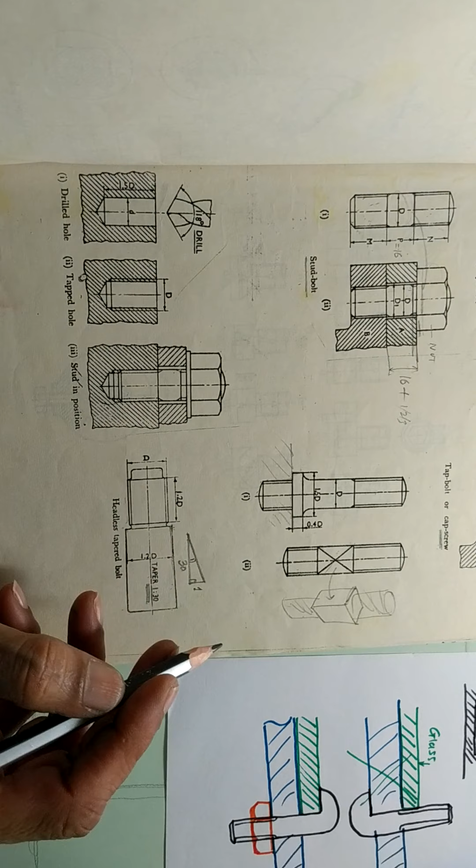The head is fitted into whatever plate you are using, and then the clamping takes place. Suppose we want to see how it looks like, it can be shown like this.

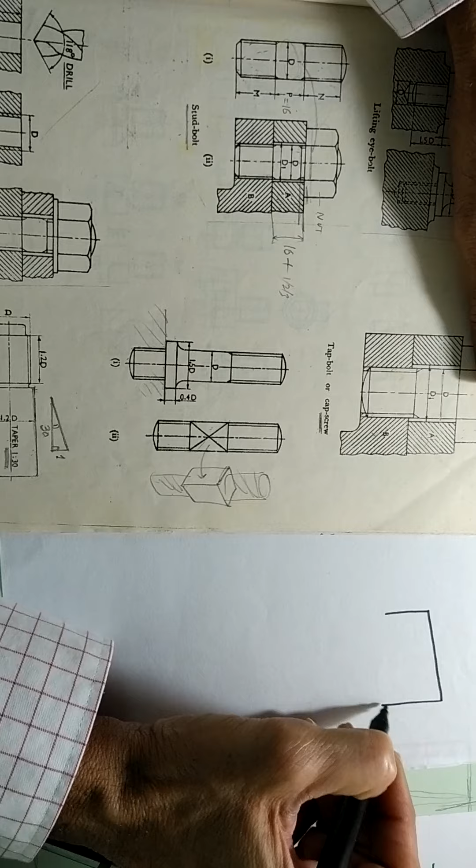So there is a taper head, then there is a threaded shape, there is a threading, in this part there is undercut, and this is just a remaining part.

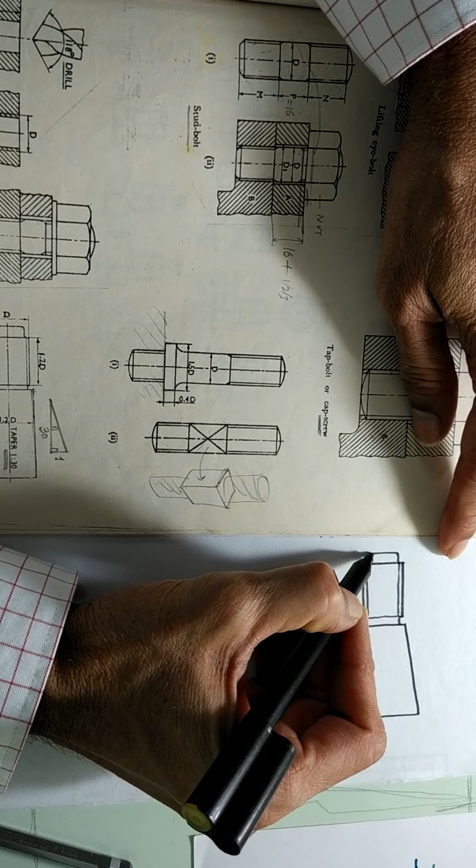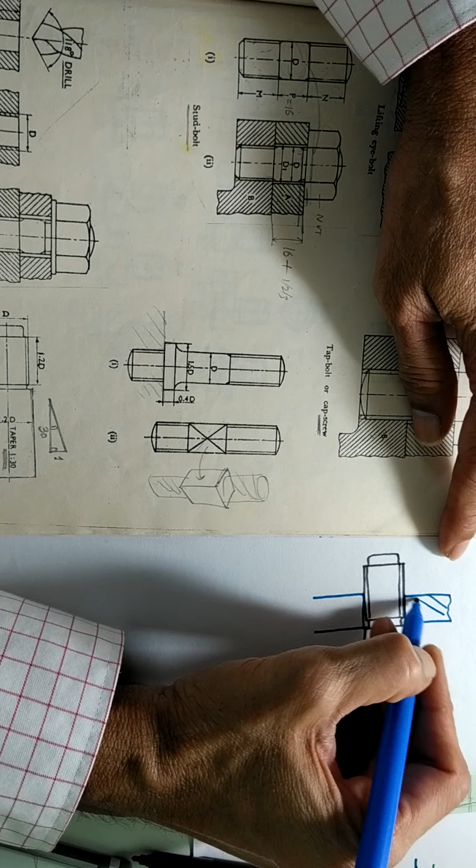So the frame in which it is fitted, you can think of a frame something like this. In this frame there is a hole, say this is the hole. So this is a frame, and on this side, or maybe you can call this as a frame and this as a part.

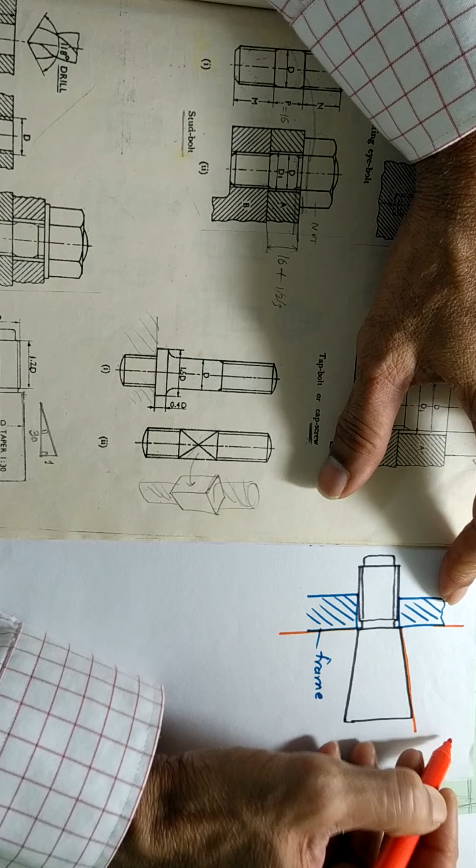Maybe I can show like this. Let us call this as a frame, not this. This is frame, and to this frame you are fixing this as a plate. So you want to fit this plate to this frame.

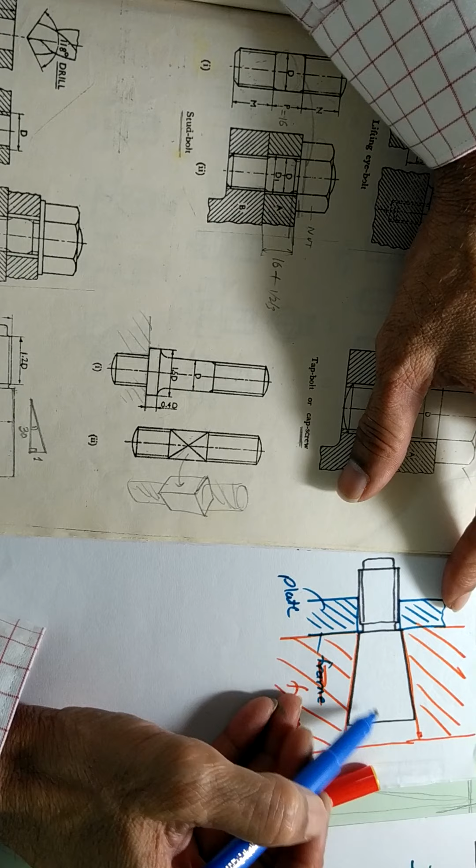So in the frame you have made this taper hole. The taper bolt is fitted like this. Then it is projected out on this side like this, and on this side you are having a plate, and after the plate now you are trying to clamp it with the help of a nut. So here nut will come like this.

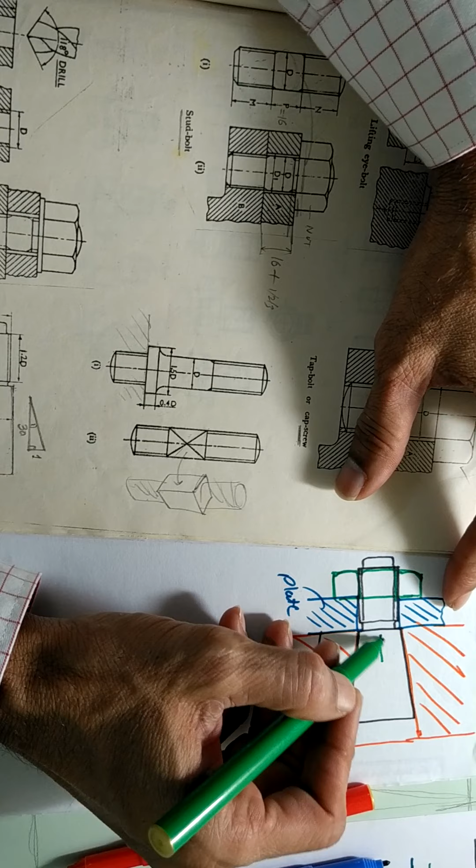So with this nut you have clamped this particular plate to the frame, and this part of the head, it is not possible for us to hold it, but because of the taper shape and the friction, when you are trying to clamp this nut, the bolt will be pulled in this direction, and friction will be applicable here. Because of frictional force, this particular head will not rotate, and then you will be able to clamp the nut, and the overall clamping will take place.

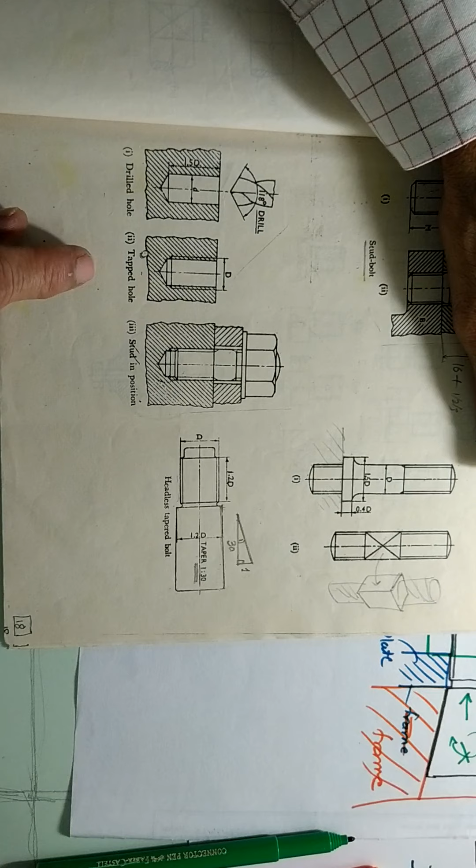Now next is the assembly of nut into the internal threading. Now this is extremely important topic. This particular topic is extremely important. What we are going to learn here is the threading convention. So try to follow this very well.

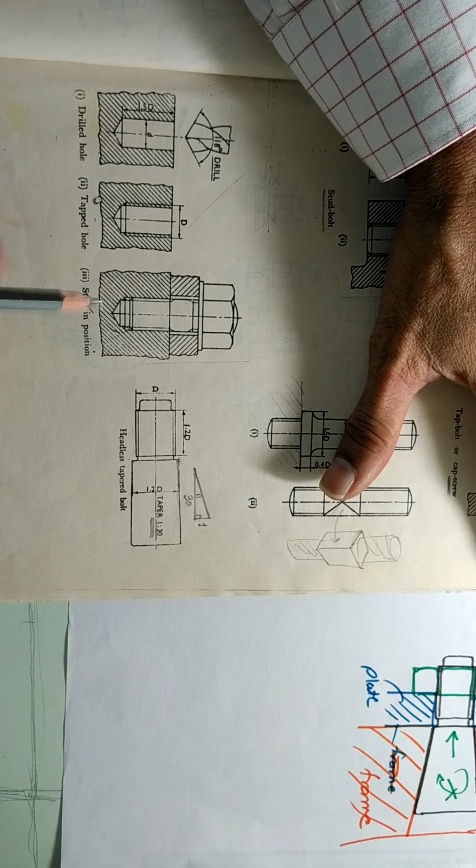We are going to draw a lot of nut bolts in the case of assembly and detailed drawings. So that time this convention is extremely important. Please let me repeat again, this topic is extremely important. We are going to use this convention many times in future. So try to understand this very well.

What is shown here is, this is a part, maybe this is a frame. In this frame you are trying to fit this plate on this frame with the help of a stud or any bolt, you can say. So how this is done is shown in 3 steps.

So first thing is, in this frame, this is a frame. In this frame, initially a hole is drilled. So this D is the size of the hole. Initially hole is drilled, and because of this hole, you can see here a drill is shown.

The angle of this tip of the drill is normally 118 degrees. As a result, there is a conical shape shown here at the end of the drilled hole because of this conical shape of the drill. So the drill hole is made of certain depth, in this case 1.5 D.

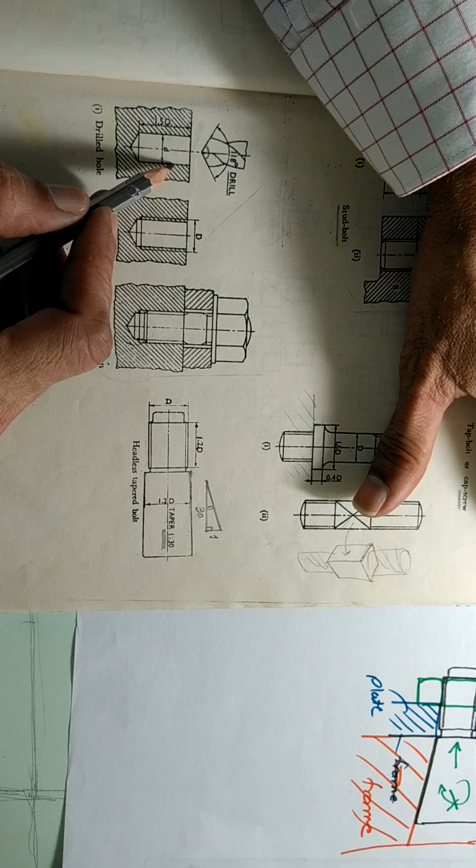It can change. Then threading is cut onto this surface. So whatever surface you see here, in this surface threading is cut. So when you cut a threading, the material is removed from this. I will draw maybe here.

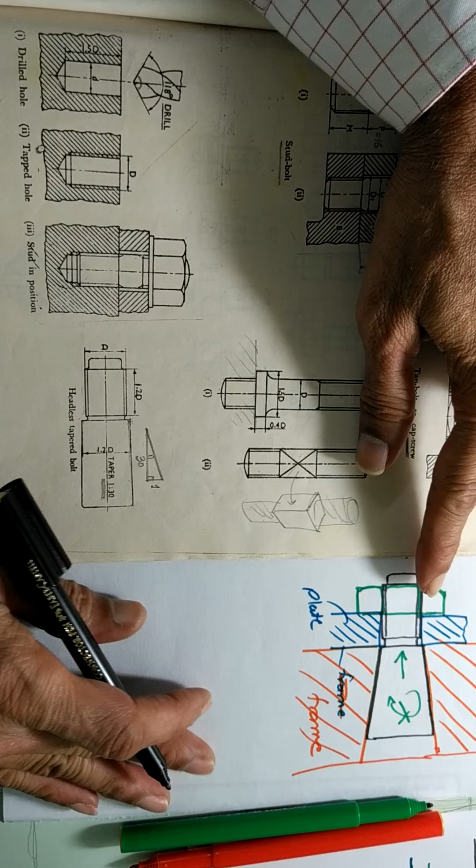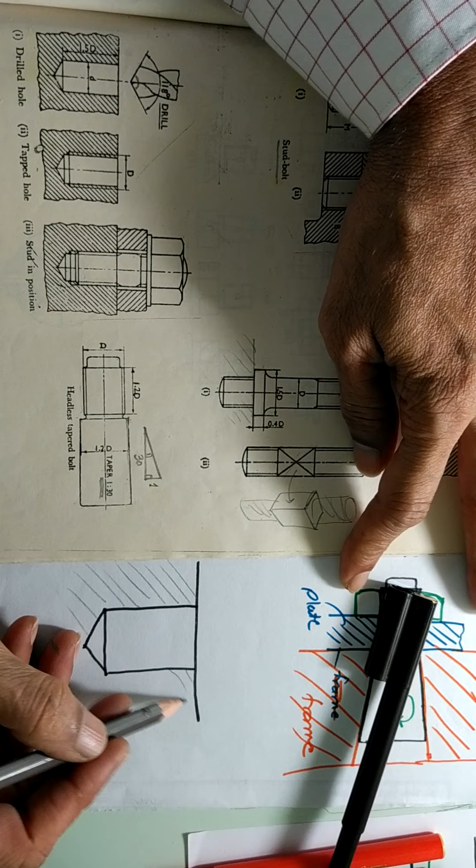So here this is a frame, and in this frame a hole is drilled first like this, and here there is a material. Now when you cut a thread, from this surface you are going to cut and remove material to form a helical groove.

So if I show in real practice, this is a kind of a groove, this will not be there, and you have removed material and formed a helical groove of a thread. Now we are not showing the threading like this, we are showing the threading by convention.

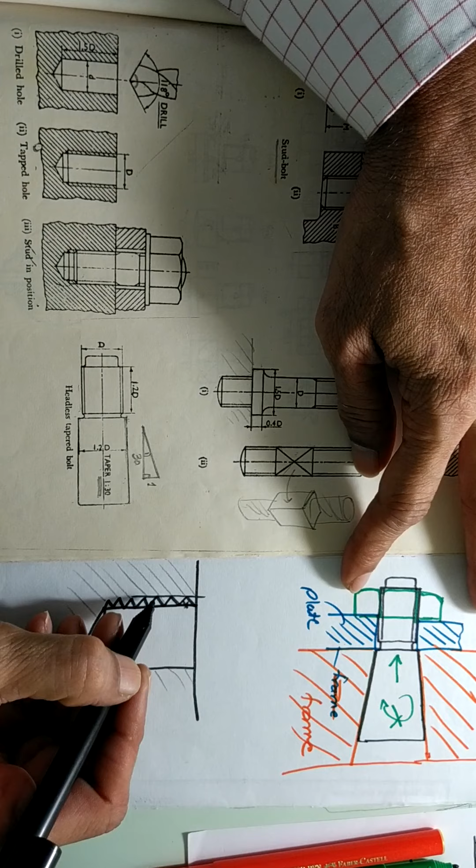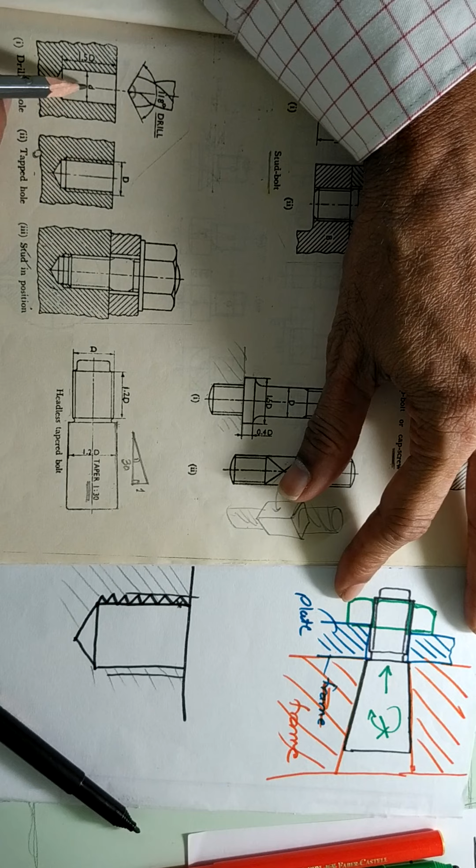So this particular diameter, which is the diameter inside the groove, is shown by one light line over here. You can see now here, this line is drawn both sides, which is not a dark line, it is medium dark, drawn outside this small d. Now this out to out distance is capital D. This inside distance is small d, outside distance is capital D.

So in this case, this is capital D, and here this much is small d diameter. So threading is shown by this convention.

So out of this total depth, suppose I will just show some numerical values. The hole was drilled of, let's say, depth say 26. That means this 1.5 D is 26. Then out of that, the threading is cut for certain depth. Now this cannot be 26, this will be less. So let's say 24 mm depth is the depth up to which the threading is cut, which we are showing like this as a convention.

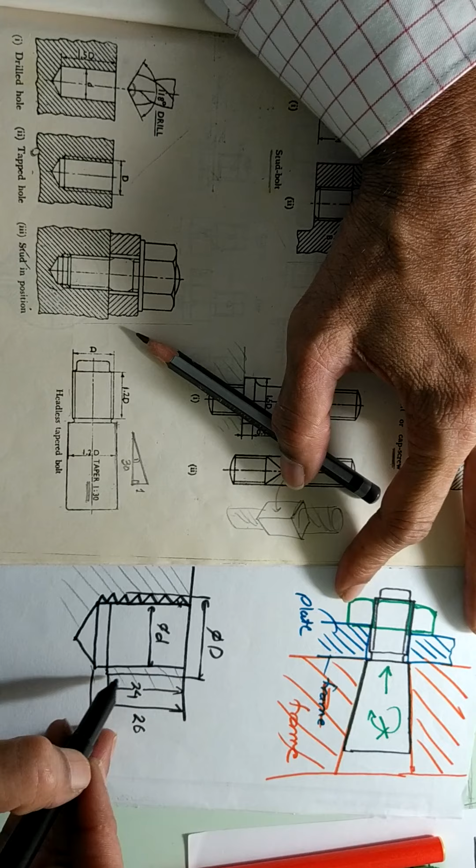Now as far as the section lines are concerned, these section lines will still be drawn till this small d, because material is still there, although it is forming a groove, still some material is there.

Therefore the section lines are passing into this threaded line. You can see here also section lines have come inside the threading on both sides. So this is a drilled hole, then there is a tapped hole. Threading means tapping is done, so it is a tapped hole.

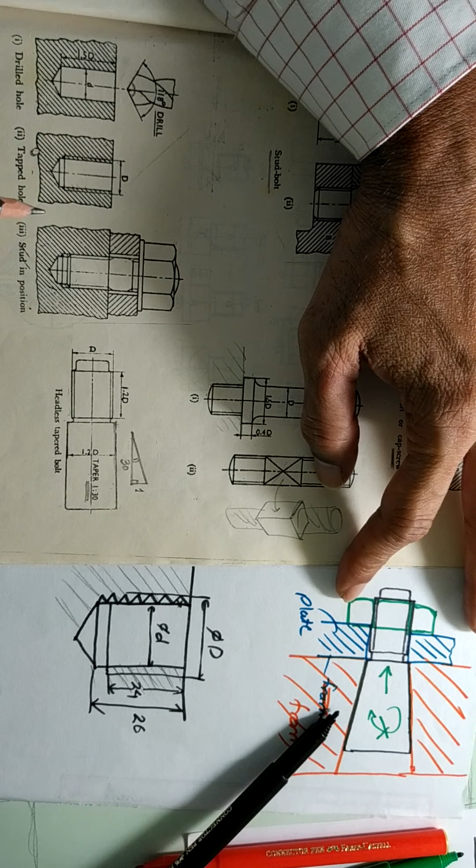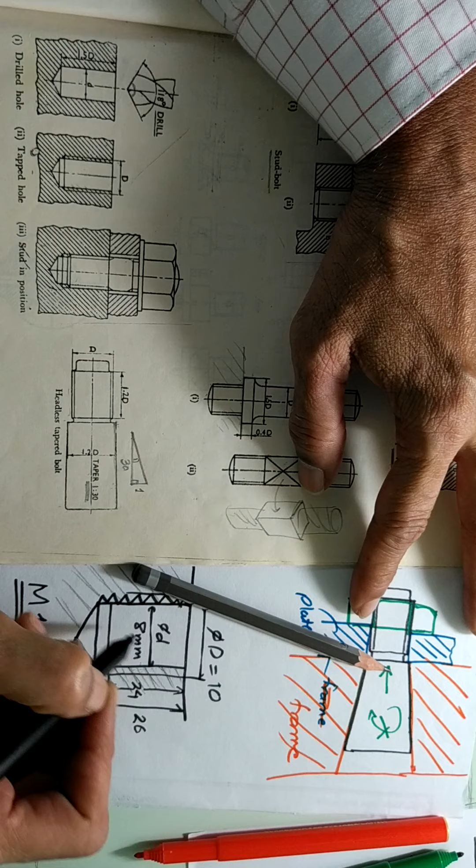Now let's say we are doing this for a bolt of size 10, that means M10. So for a bolt of size 10 mm, this capital D is going to be 10 mm. And small d, maybe it is 8 mm, lesser than the outside diameter. That means the hole which is cut here is of size 8 mm. When you perform this tapping, the groove diameter, inside to inside, this groove to this groove, that diameter is going to be 10 mm, because the bolt which is going to fit here will have size 10 mm. That's why it is done like this.

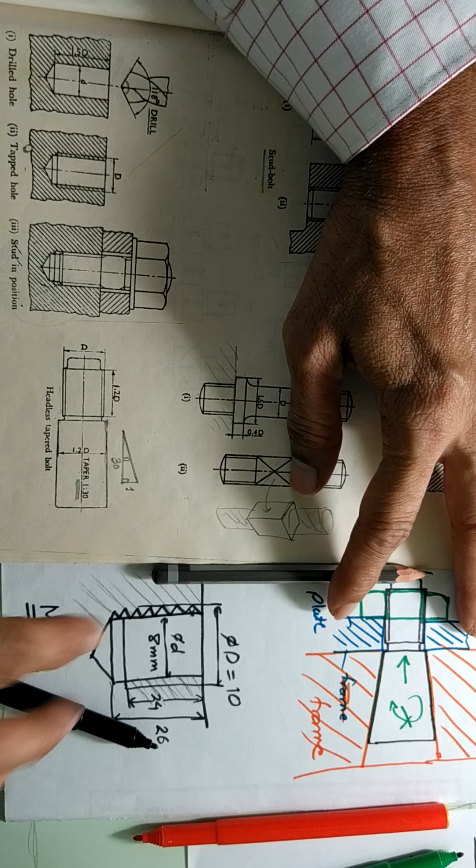Now the next thing is assembly. Up to here there is just a hole with tapping done. Now the bolt has come and is fitted like this into this threading. So when the bolt is fitted into the threading, you can see this was the depth of the drilled hole, and this is the depth of the threaded hole. In this case, from the top this is 26, and this line is 24, up to which threading is done, and after that the bolt has come and is fitted.

Let's say the bolt is occupying this threading up to a certain depth. Up to here it is 24, but the bolt has come only up to here, which could be, let's say, 22. So out of 24 mm threading, the bolt has come only up to 22. Why has it come only up to 22, and not 24? Because you can see this taper shape - the line we draw here, just at the start of the taper shape, the useful threading is only up to here.

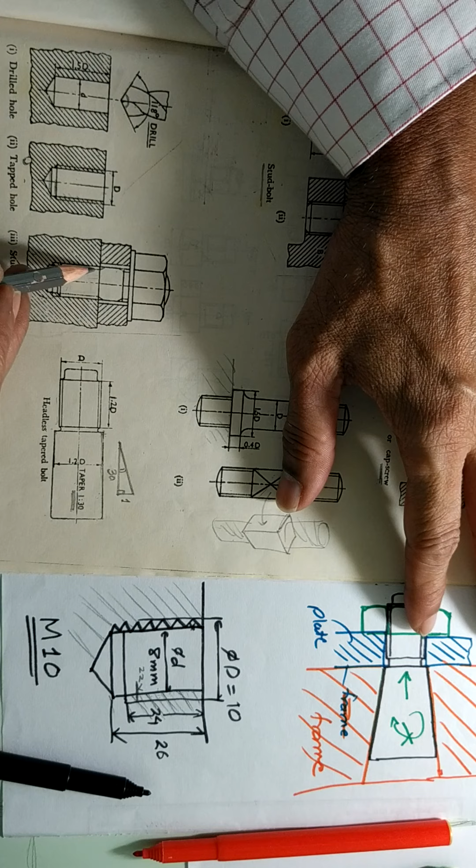The threading after that is of no use. That means the bolt threading will go inside the nut threading, or the internal tapping, only up to this line. This line matches the level, so the bolt has gone maximum inside and still has not reached 24 mm, it has reached only, let's say, 22 mm.

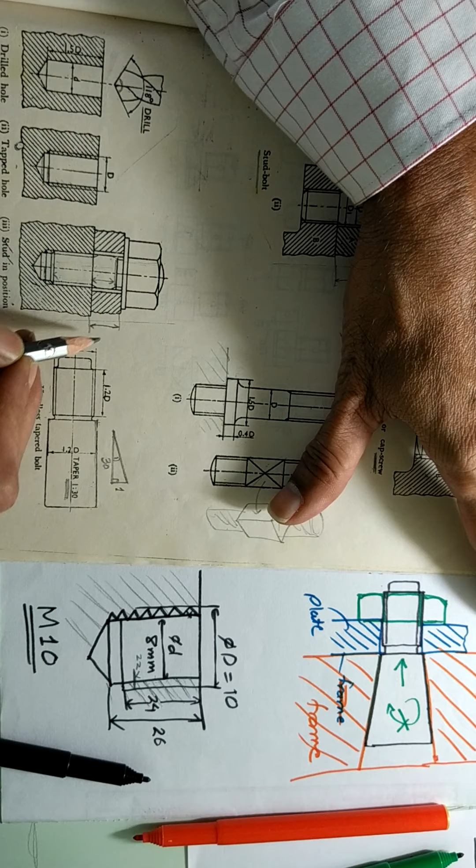So now the stud bolt is in position. This much part of the stud bolt has no threading, and then there is some more threading above. This depth, this line, is such that the unthreaded portion remains inside the thickness of the plate. So this is the thickness of the plate, and the unthreaded part is hiding inside it, not coming above this level.

Now the threading starts from here. Threading should start slightly below the level, while still inside the hole. From inside the hole the threading has started, like this, and then it continues up to a certain level.

Out of this length of threading, this much part from here to here is covered by the washer. This is a washer and this is a nut, placed here. First the washer is placed, then a nut is engaged with this threading, and once the nut touches the washer, firm clamping takes place and this particular part gets clamped.

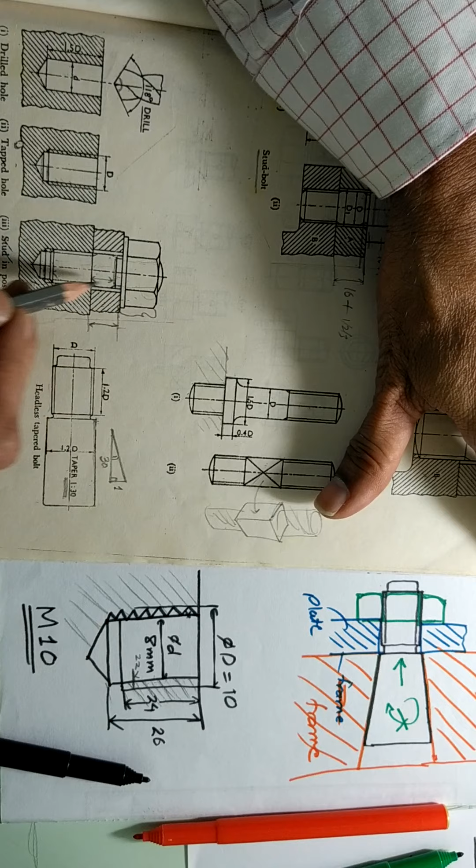So now there is an assembly of bolt and nut, or bolt and internal threading. Up to here, when there is no bolt, there is only internal threading. How do you draw the top view? For this part, I will draw the top view here, using this small d circle - this size is 8 mm - and it is 10 mm.

So the 8 mm circle will be a complete circle because it is fully seen. Just below this I will draw a top view such that this 8 mm circle is complete. For the 10 mm diameter inside the groove of the thread, when you see from top, this 10 mm diameter is not seen. So this 10 mm is drawn as a medium circle, and it is incomplete - more than 3/4 but not closed - because this circle is not seen from top, but the size is 10 mm, and the size of the other is 8 mm.

So this is the convention for the tapped or threaded hole, how it is seen in the other view. This is how threading is shown in the sectional front view, and this is how it will be shown in the top view - this is internal threading. Now when you see this assembly in the top view, the threading of the nut is engaged with the threading of the bolt, and now we want to draw the top view.

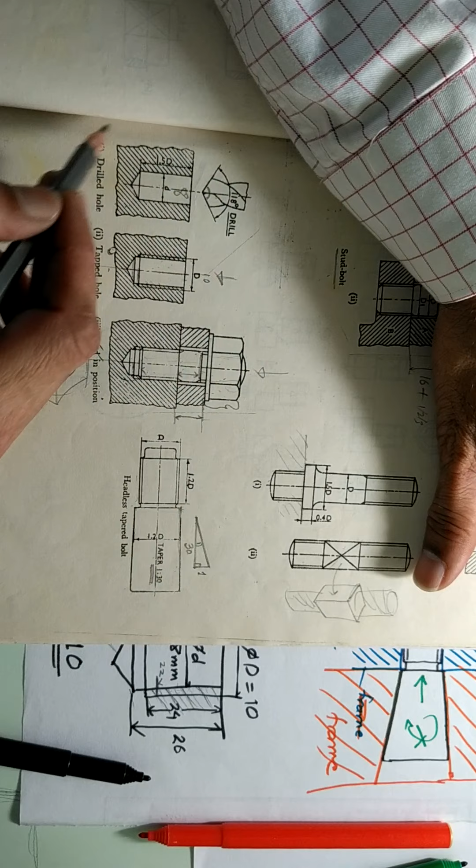And then the rest of the shape, the chamfer circle, the hexagonal head and other things can be drawn. What I have to mention is how the threaded convention is shown in this example. This exercise, this assembly, you have to draw very carefully and understand what it means - that is the drilled hole, the tapped hole, and the stud in position. So this is assembly of a bolt into the threading of the internal part.

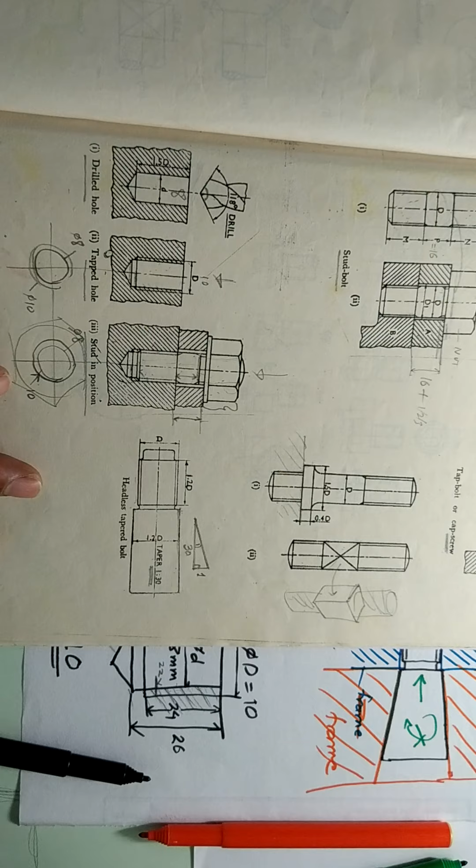So this completes types of bolts. We have seen different types of bolts in this practice sheet, and we have seen how the threaded convention is made use of, how to show the external threading, how to show the internal threading in the front view and in the top view.

You will also notice one more thing here, that the section lines which are shown - we have seen section lines are entering into the double lines because material is still there. Now when the bolt comes, in this much part, the threading is for bolt as well as for thread, as well as for the nut. Now what do we do for the section?

The section lines are drawn for the internal threading. In this part, internal and external both threadings are there. Now the convention is we have to go by external threading. In this case, external threading is of the stud threading.

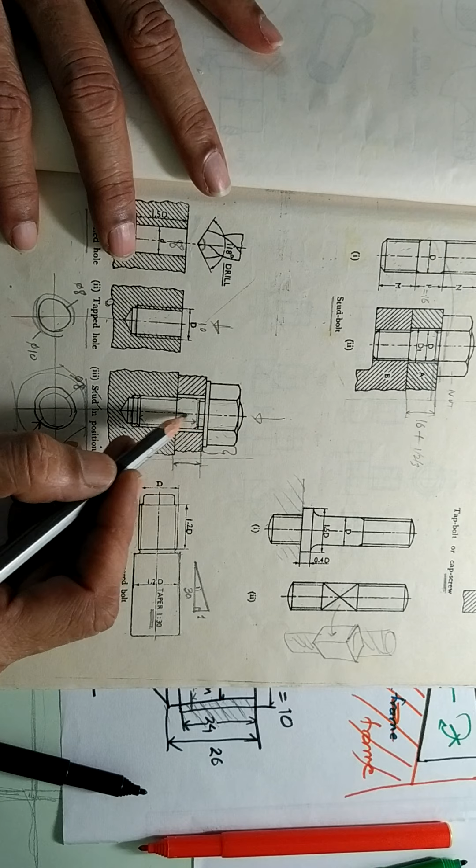Now stud threading is not shown, the stud is not shown by any section lines. Because there are no section lines for the stud, in this common portion, we are going by external threaded convention. So the external part doesn't have section lines, so this part will not have sections. You can see here double lines, it doesn't have section lines because this part belongs to the stud.

And the part here which is not occupied, 22 and 24 - in this 2 mm part, there is a threading, but it is not covered by the bolt. So the section lines are coming up to here. That means whatever is shown here is still valid, because the bolt has not come up to here.

But up to where the bolt has come, the section lines have gone, because we are going as per bolt, and bolt is not shown by section lines. So here there are no section lines.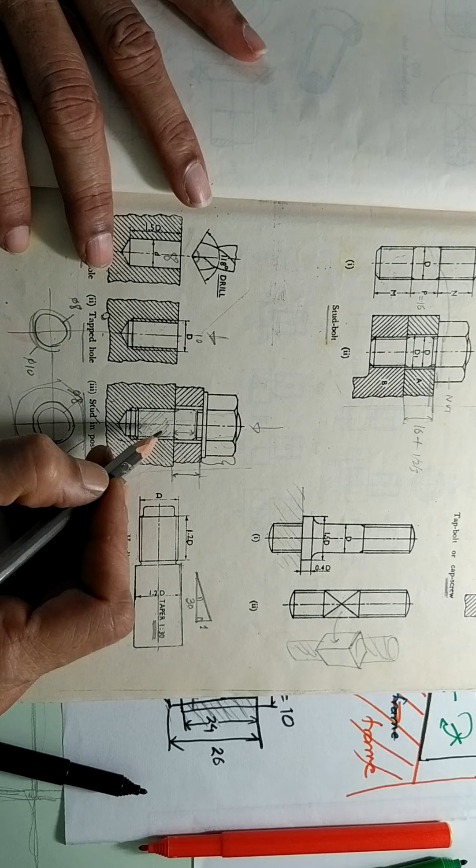Suppose this part is not a bolt, it is some part which is given external threading. In that case, you can show this part by section lines. So these section lines will enter into these double lines - section lines will be inside the double lines, because these section lines belong to the external threaded part. So they will enter here.

For a bolt, we are not showing section lines because it is a standard bolt. So for standard parts, we are not showing section lines. So there are no section lines. So this also is a convention which we must know very well.

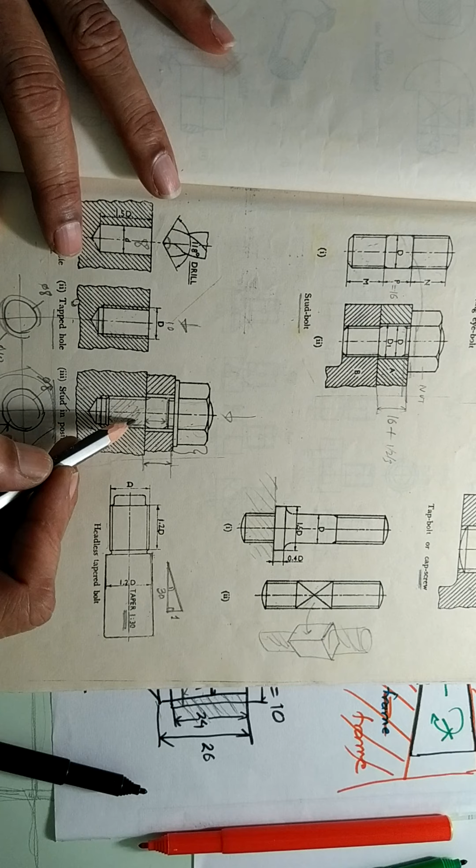What do we show? Which section do we have to show - the section of an external threaded part or the internal threaded part in the common place? The answer is we have to go by the sectional lines of the external threaded part when there is a common area like this. This is a very important topic as far as understanding the conventions are concerned, so try to understand this part very well.

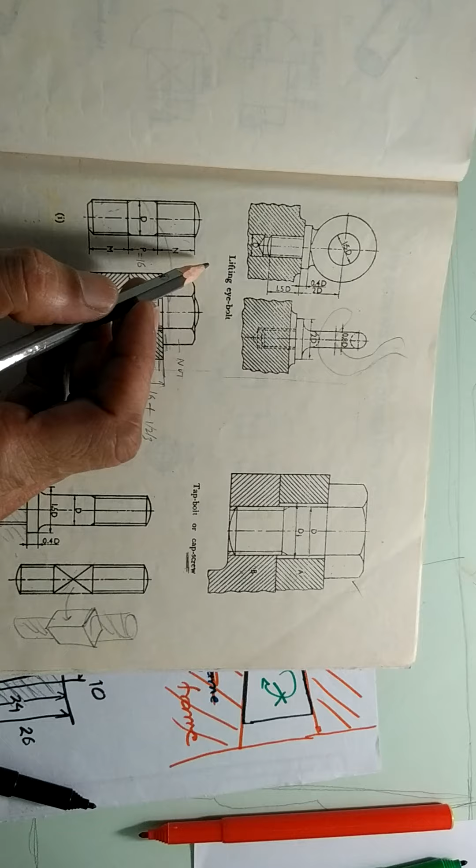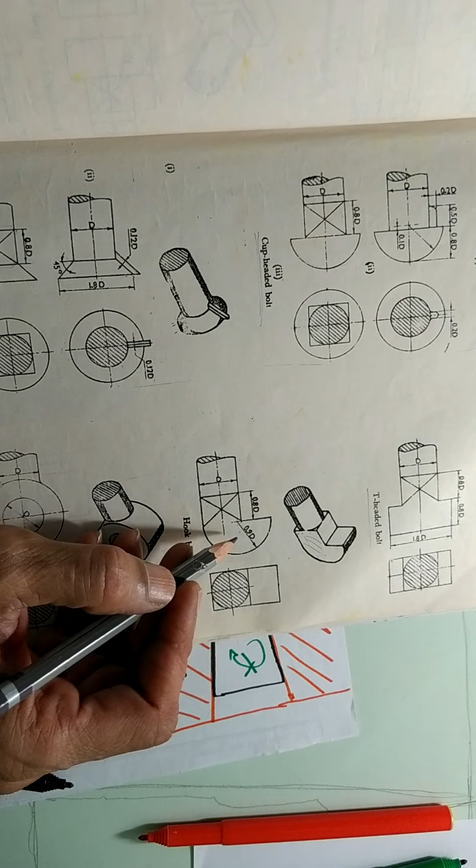So just to revise, we have studied headless taper bolt, stud bolt, lifting eye bolt, and a cap screw of small size. Then there are some more bolts, like eye bolt, countersunk bolt so that the head will remain flush with the surface, and hook bolt for fixing parts where you are not permitted to provide a hole.

T-headed bolt for fitting in T-slots, then cup-headed bolts having a spherical head, then the cylindrical headed bolt, then the square-headed bolt, and a very commonly used hexagonal headed bolt with all the conventions. So that is types of bolts, practice sheet number 3.

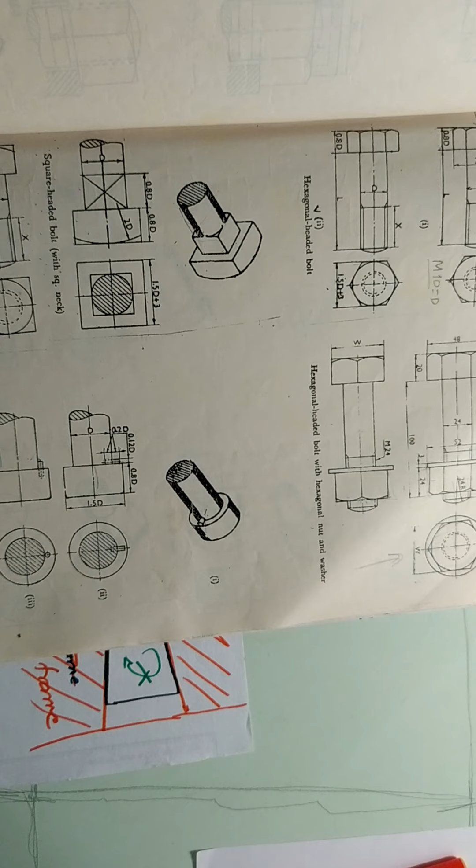You have to draw this practice sheet. While drawing, you have to draw this page, then the next page, and then this next page. So 3 pages - whatever is shown on these 3 pages, everything you have to draw as it is and understand the conventions that are shown.